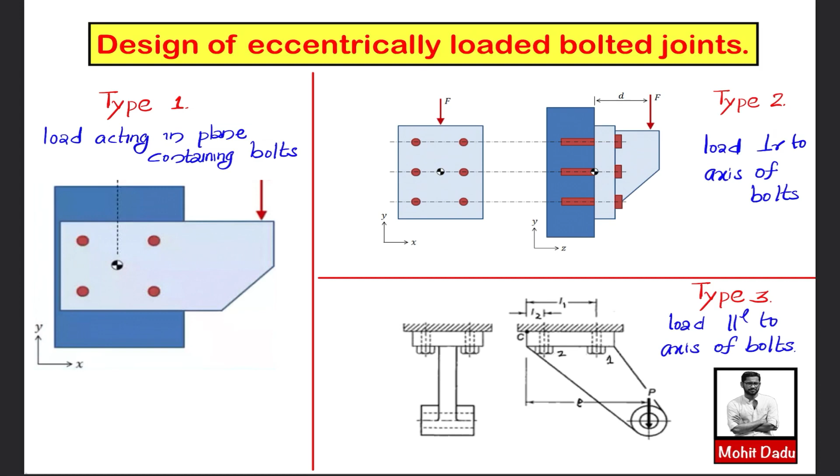And in the last case, the bolt axes are coming in this direction, and load is acting in a direction parallel to the axis of this bolt. So this is case 3. And in this video we'll be discussing the detailed design of the bolts which are coming as a part of type 1, that is, the eccentric load is acting in the plane that is containing the bolts. So let's get into it.

So here you can see these three figures. First we'll be starting from the leftmost one. This is showing you the two plates joined by this bolted joint. Here you can see 4 bolts which are coming in this plane, and the first step will be to obtain the CG of this bolted joint. Here 4 bolts are there, you can consider each as a point. If you are naming the bolts as 1, 2, 3, 4, and you suppose a coordinate system is lying here, this is the x axis and y axis.

Then you can find the CG by x1 plus x2 plus x3 plus x4 divided by 4, since you are considering the bolt locations as points. And similarly the y coordinate of the CG is y1 plus y2 plus y3 plus y4 divided by 4. If you solve this, you will get the CG. Otherwise, based on symmetry or observation, you can obtain that the CG will be lying here. Next you will evaluate the distance between this CG and the position where the load is acting, and that distance will be known as eccentricity.

So the next step will be to transfer this eccentric load acting at this position to the CG. For that we will be considering equal and opposite forces, and we will be placing this force here. So F will be remaining there, and this pair of forces, F acting upward and F acting downward, will be creating a clockwise moment, and the value of that moment is equal to F into the distance, that is F into e. As a result, in the final loading diagram we have a load of magnitude F acting at the CG of the bolted joint, and a torsional moment whose value is F into e.

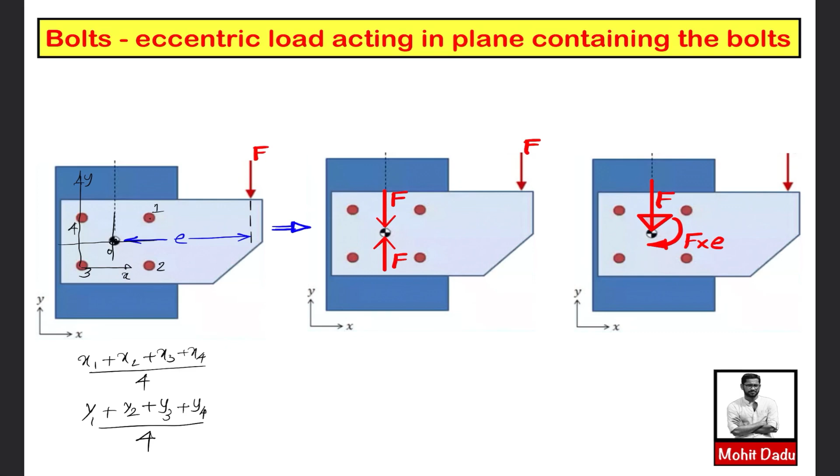So now we will be seeing the effect of the load F and Fe on this bolted joint, and based on that we will be doing the design. First we will take the effect of the load. For that I am drawing this bolted joint. The bolt locations are shown, and here I am marking only the external force F. If you observe, the bolts are lying in this plane, and the load is acting parallel to this plane. That means the load is tangential to the bolt cross section. So this will be creating a tangential stress, which is shear stress, and that shear stress will be known as primary shear stress.

So this shear stress we will be calling the primary shear stress, or we will first be evaluating the load. So this will be creating the primary load. Since all bolts are of the same cross section, the contribution or the load share taken by each bolt will be the same, and I am naming it as F1A, F1B, F1C, F1D for all of these bolt locations.

And since it is the same, F1A will be equal to F1B, equal to F1C, equal to F1D, and that will be equal to the total tangential force divided by the number of bolts. Since 4 bolts are there, it will be equal to F by 4. I will be showing all the equations required at the end, which are given in the data book. This is given in this equation.

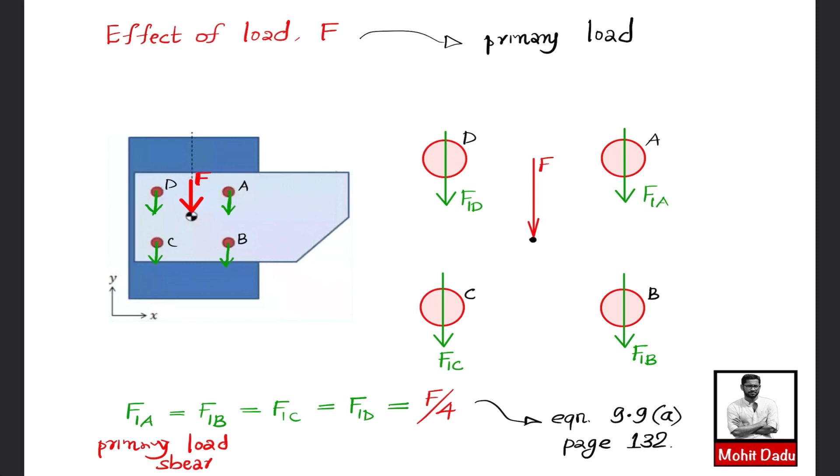This is known as the primary shear load acting on each of these bolt locations. So this is actually the primary shear load, and it is produced because of the effect of load. Next we will be considering the effect of the moment F into E. So in this one you can see the effect of the couple or moment F into E.

If you observe, this will be acting as a torsional moment because it will be trying to twist or induce shear stress. So this will be considered a torsional shear load, and that is known as the secondary shear load, and I will be calling it F2. So we have to find the magnitudes of this secondary shear load at all of these locations, and the secondary shear load at A will be called F2A, similarly at B F2B.

So you have F2C and F2D, and we have to calculate the magnitudes of F2A, F2B, F2C and F2D in such a way that they balance the moment initially present, F into E. So the sum of the moments of all these forces about the CG should be the same as this F into E.

If you have the CG here and bolt location A here, then you can draw a line that gives you the shortest distance, and the distance will be known as RA. You can evaluate it based on the geometry, and that will be discussed when we are solving a problem. Then F2A will be perpendicular to this line joining the bolt location and the CG, and in this direction because the moment is clockwise.

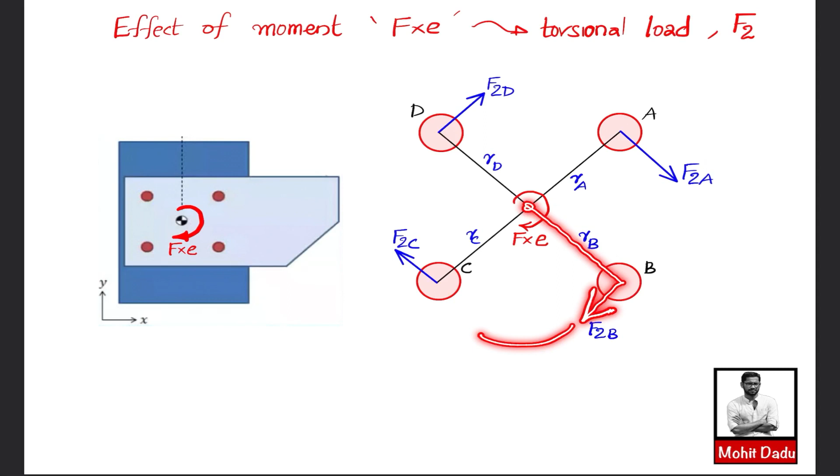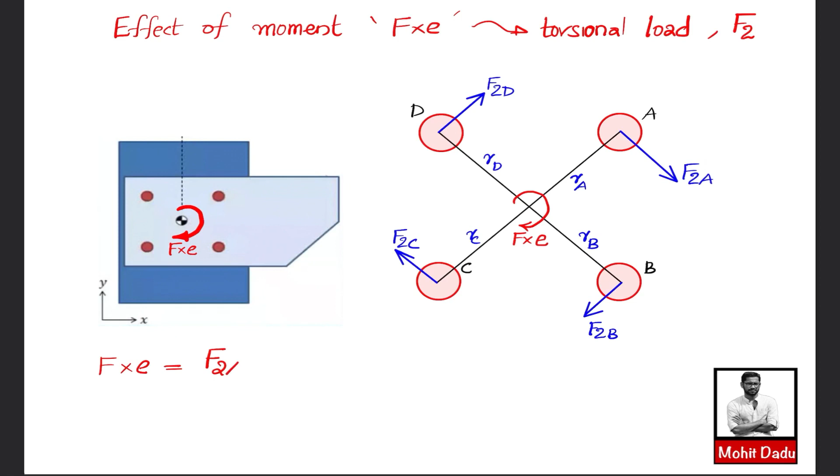Similarly, F2B will be perpendicular to the line RB, in this direction because it is clockwise. In a similar way you can draw the direction of F2C and F2D. Finally, the moment created by F2A about the CG will be F2A into RA. Similarly, the moment created by F2B will be F2B into RB. So the initial moment, F into E, can be replaced by the secondary shear forces, that is F2A into RA plus F2B into RB, and so on.

So finally F into E can be written in this form. And if you observe, the secondary shear loads will be proportional to the distance from the CG. R is the distance measured from the CG to the bolt location. It is the general expression. Then you can write F2A is proportional to RA and F2B is proportional to RB.

In a similar way you can write it for all the bolt locations, and you can remove the proportionality sign with a constant. That means you can write F2A as some constant K into RA. Similarly F2B as K into RB, F2C as K into RC, and the last as K into RD. So you can substitute these terms here: K into RA, K into RB, K into RC, and K into RD.

If you simplify this, you will get the expression for K, which is equal to F into E divided by RA square plus RB square plus RC square plus RD square. Once you have the value of K, you can find the secondary shear force F2A, which is equal to K into RA.

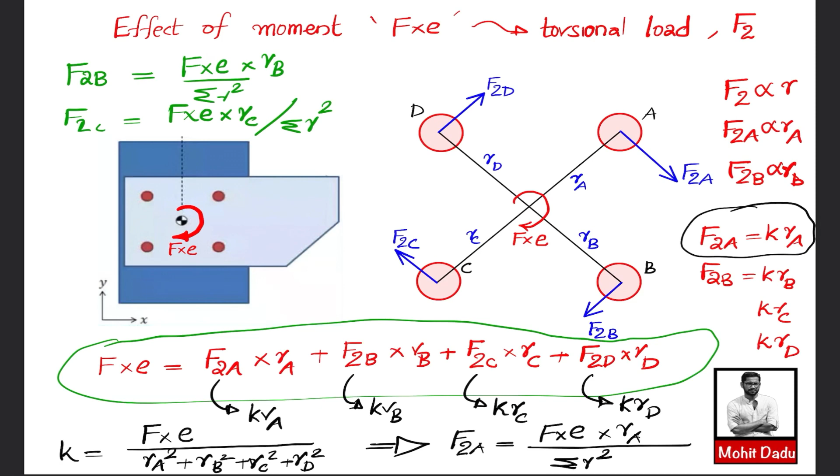So now you are having this primary shear load created due to the direct force F, and the secondary shear load created due to the torsional moment or couple F into E. So from this we will be evaluating the net load which is acting on the bolt locations. So here we will be finding the resultant load acting on the bolt. So in bolt A we are already having the primary shear loads F1A, F1B, F1C, which are having equal magnitudes at all positions and their directions are shown.

And also the secondary shear loads at each of these locations will be same, because RA, RB, RC, RD are same, and we have obtained the expression, and its direction is perpendicular to the line connecting CG to the respective bolt location. So we are having the primary and secondary shear components. From this we have to obtain the resultant shear load. So at the bolt location A, I will be showing you how to obtain the resultant of this primary F1A and secondary F2A. For that we will be using the parallelogram law.

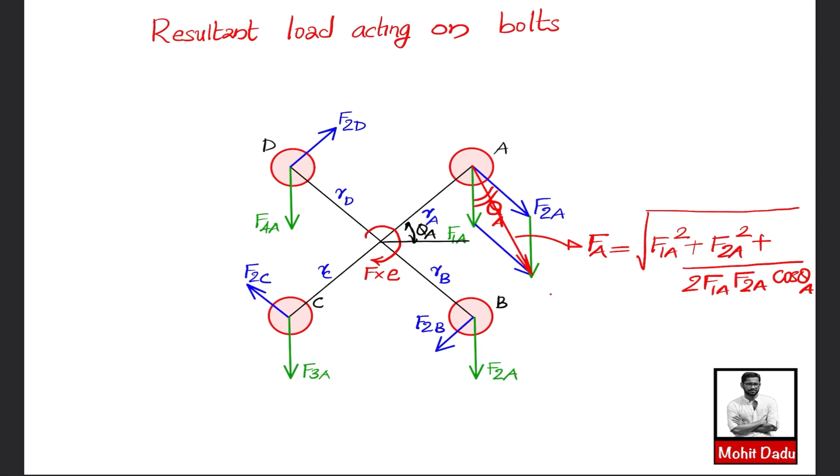So in a similar way you can evaluate the resultant shear loads at all of these bolt locations, which I will be showing you now. If you are constructing the parallelograms, then you can obtain the resultant shear load at all of these locations. That is shown by FA, FB, FC and FD. And if you are observing, the resultant shear load at A and B will be same, and that will be the maximum for this case. Similarly, FD and FC, as their vector lengths are shorter, will be minimum, and FD will be equal to FC.

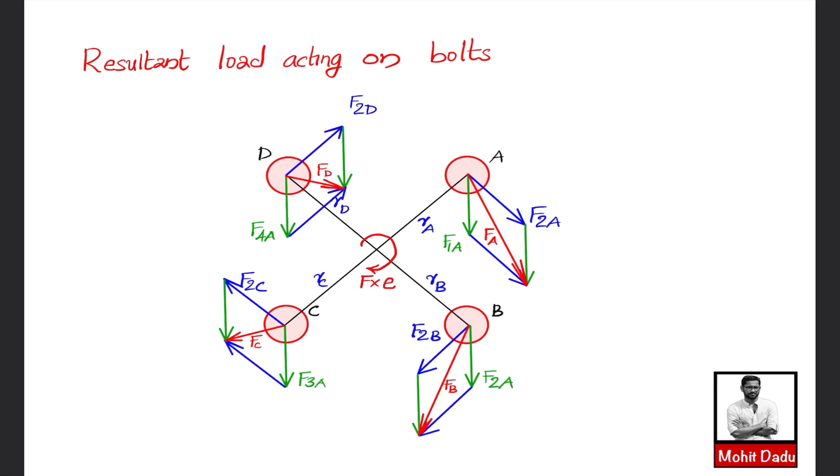So whenever we are designing, we will be taking the maximum shear loads which are acting on the bolt. And here you can see the maximum shear load is acting on the bolt A or B. So this can be used for design. So we will be proceeding with the design by taking this maximum shear load. So FA and FB are the maximum resultant shear loads.

So this will be used for design, and from this you can evaluate the tau max, that is equal to FA divided by AT, where AT is the tensile area across the weakest section, and this will be equated to the allowable shear strength of the material that may be given in the question.

So from this one you can find the value of this tensile area, and by looking at the respective column in the table for the ISO metric thread, you can select the ISO metric thread having the minimum tensile area. So based on this one you can select the suitable bolt and you can specify it. So this is the design procedure for bolted joints which are subjected to eccentric load acting in a plane containing the bolts.

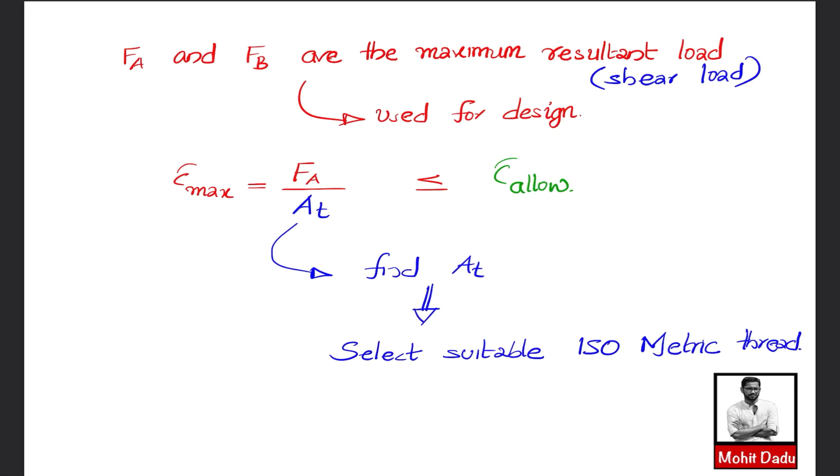So we will be solving a simple problem here based on this one. And before that I will be showing you all the respective equations for finding the primary, secondary and resultant shear load. So all these diagrams as well as equations are given here. So F by N is the way to find the primary shear load F1, or the direct shear load.

And this equation gives you how to obtain the secondary shear load, that we have already seen: F into E into R divided by sigma R square, and this is a similar expression, F into E into C divided by sigma C square, and this will become maximum when the distance C is maximum. So here all these are symmetric, so you can take any of these R for the maximum secondary shear load.

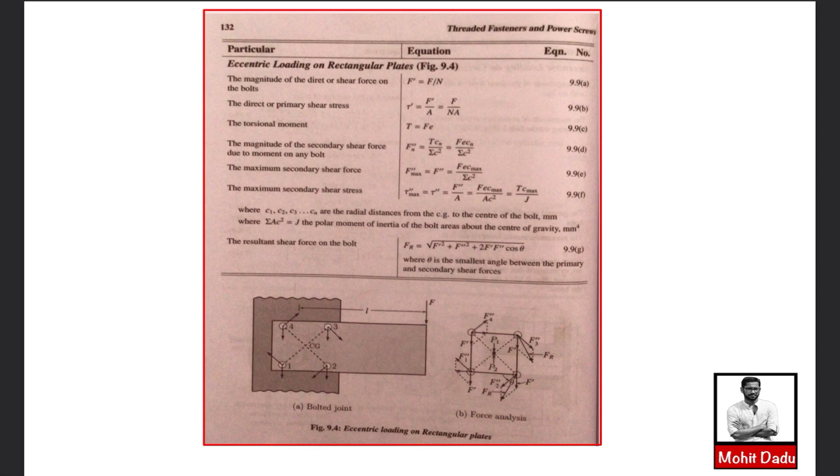Once you have the primary and secondary shear load, then you will evaluate the resultant load using this expression, at this position or this position for this bolt arrangement, and theta will be the angle between these locations. So here we have to determine the size of the bolt which is loaded as shown in the figure. We have already discussed a case similar to this one.

So the first step will be to locate the CG and find the eccentricity. Here this distance is 200 mm, so the CG will be along the mid of this line, and this distance is 150 mm, so the CG will be along this line. The CG distance up to this point will be 200 by 2, that is 100. Then you have a distance of 100 mm again, and finally a distance of 300. Adding all these distances, the eccentricity will be equal to 500 mm.

So now we have obtained the eccentricity, and we will transfer this load acting at the eccentric point to the CG. Then you will have a force F along with a couple F into E, where F is equal to 10 kilonewton. Once you transfer it, the 10 kilonewton will be acting here, and the couple will be F into E, where E is equal to 500 mm.

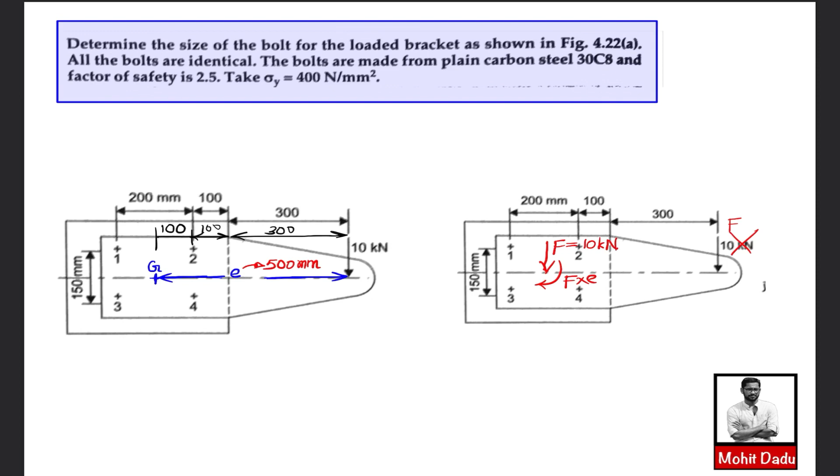We will substitute all the required values to obtain first the primary shear load, then the secondary shear load, then the maximum resultant load, and finally the tensile area, and hence the bolt will be selected. So here you can see the primary as well as secondary shear load at each of these bolt locations.

All the primary shear loads F1A, F2A, F3A and F4A will be equal to each other. Since we already know the bolt at A is critically loaded, or the maximum resultant shear load is acting at A, you will evaluate F1A as the total force divided by 4, since 4 bolts are there, using this equation. You will get the primary shear load as 10 kilonewton by 4, that is 2.5 kilonewton or 2500 Newton. Next you will evaluate the secondary shear load.

For this you will be using this expression, and the secondary shear load at each of these bolt locations is the same, since RA is same as RB, same as RC, same as RD. Here we will be evaluating the distances RA or RB. The CG you are having here, so if you know this distance, you can find RA or RB; all are same. So this distance will be equal to 200 by 2, and this distance will be equal to 150 by 2, that is 75.

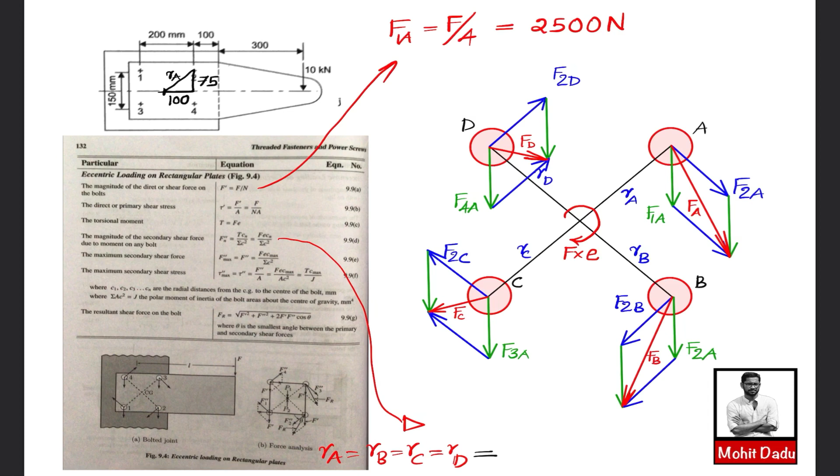So RA or all of these values are same, and this will be equal to square root of 100 square plus 50 square. If you evaluate, you will get this radial distance as 125 mm, which is same for all the bolt locations. You can also evaluate theta from here. In finding the resultant we will require the value of cos theta. From this triangle you can evaluate cos theta as the adjacent side 100 divided by the hypotenuse, which is RA, that is 125, so this will be equal to 0.8. So this is the value of cos theta.

So now we have evaluated the angle between primary and secondary. Now we have to evaluate the magnitude of secondary, that is F2A, which is equal to F2B, F2C, and all values will be same. This will be equal to F into e into RA divided by sigma RA square. Sigma RA square means RA square plus RB square plus RC square plus RD square. If you evaluate, finally you will get F2A. Secondary is also same at all these locations, and that will be equal to 10 kilonewton, or 10,000 Newton.

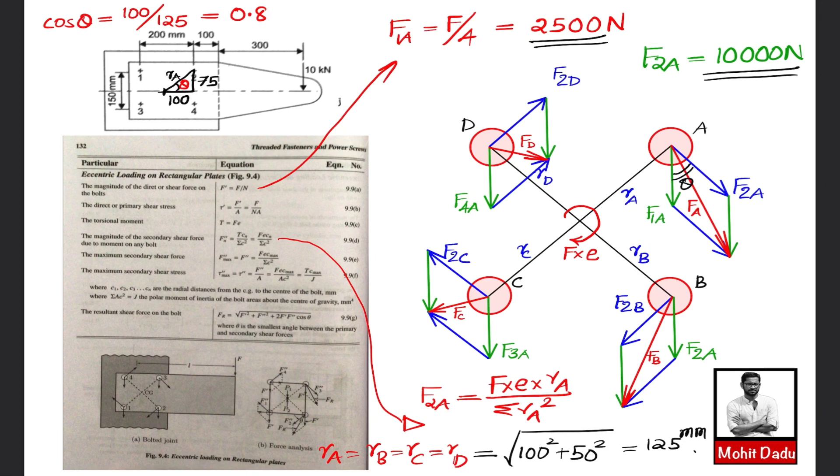So now you have the primary shear load and secondary shear load. From this you will evaluate the resultant shear load, and you have the angle theta, so cos theta also. The resultant load at A will be equal to square root of F1A square plus F2A square plus 2 F1A F2A cos theta A, where F1A is 2500 Newton, F2A is 10,000 Newton, and cos theta is 0.8. Evaluating, the maximum shear load at A and B are same, equal to 12,093 Newton.

From this you will evaluate the maximum shear stress, which will be equal to the resultant shear load by shear area corresponding to the weakest section, taken as At, and this should be equated to the given property, that is tau allowable. In this problem the value of sigma yield is given, so tau allowable should be equal to tau yield divided by factor of safety, and tau yield is half of sigma y, that is sigma y by 2 divided by factor of safety. It is mentioned to take a value of 2.5.

Sigma y is given as 400 megapascal. Substituting, 400 divided by 2, in Newton per mm square, divided by 2.5, the factor of safety. Here 12,000 is in Newton, so the left side has force in Newton and the right side has stress in Newton per mm square. Solving, you will get units of mm square, and the value of At, the tensile area, is equal to 151.17 mm square.

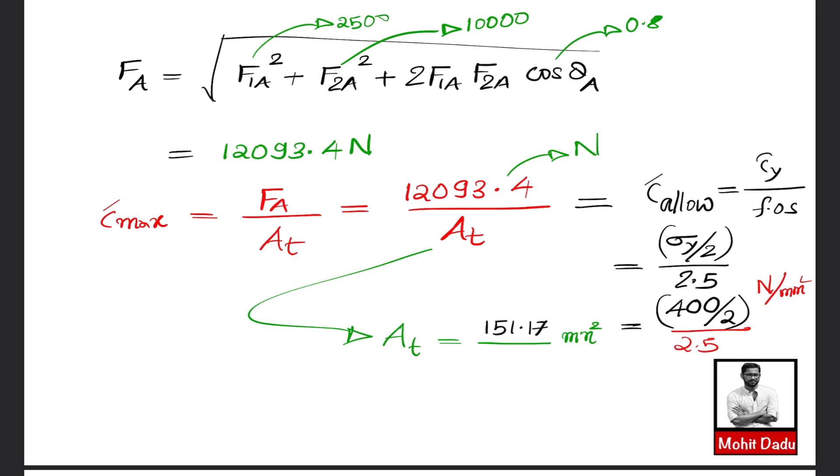Based on this, you will select the bolt from the data book using table 9.8. The value of At obtained is 151.17 mm square. From table 9.8 given in page number 141, the value to be taken is the next higher value, corresponding to 157. So the final selected bolt will be M16 by 2, that means 16 mm major or nominal diameter with a pitch of 2 mm. So this is the final answer where this eccentric load is acting on the bolted joints.